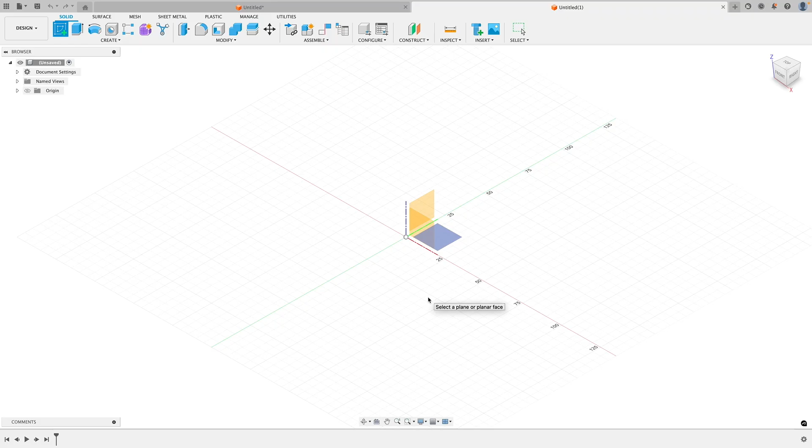So the first thing I'm going to do, we're in Fusion. I'm going to come up here and create a sketch by clicking on the Create Sketch icon. I'm going to choose a plane to sketch on. I'll choose this vertical plane here because I'm going to draw a profile of the wheel looking at the wheel from the edge. Once I'm done with that profile, I'm going to rotate it around this vertical axis. You'll see what I mean by that later on.

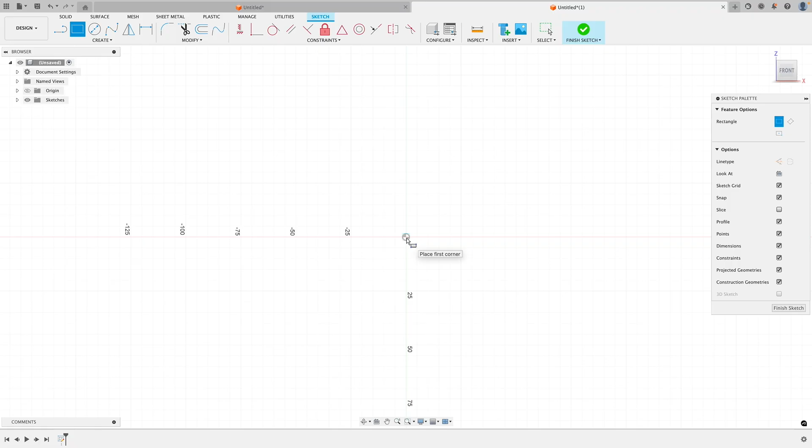So for now, I'm going to select this plane, and I'm going to start by drawing a rectangle here. I'll click on the rectangle, 2-point rectangle icon up here, click on the origin, come out here. Before I dimension this, let me say I use metric dimensions. I find dealing with those much easier than dealing with English measurements. The dimensions I'm going to use here are probably not 100% accurate for drawing this wheel.

Basically, I'm just trying to show you the steps involved. If you were going to do this for real, you'd actually have to figure out what you want your thickness of the wheel to be, and the diameter, and so on.

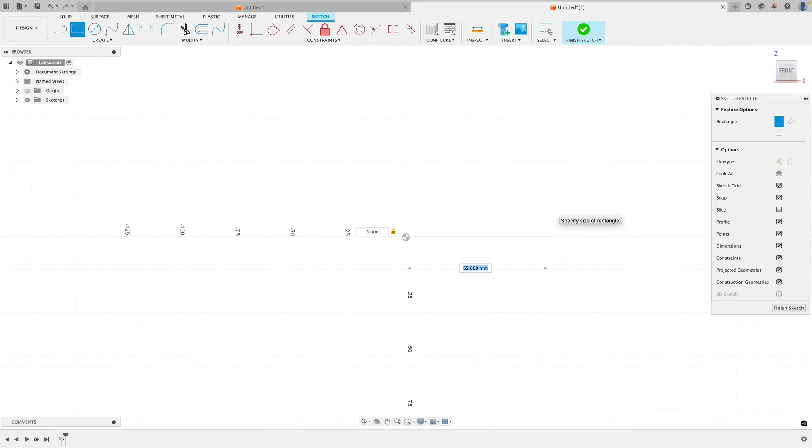Right now, this first measurement I'm going to put in here is going to represent basically half the thickness of the hub of the wheel, the center of the wheel. This will make more sense later on as we progress, but I'm going to say that this is 5 millimeters. Then I hit tab over this, and I'm going to say make this wheel about 3 inches - we're looking at the radius of 1.5 inches in millimeters, which is about 38 millimeters. So I'm going to make this 38 millimeters. Press enter here.

So I guess the next thing worth mentioning is let's take a look at this sketch up here. You can see this is the sketch I'm working on right now, and it has this little lock here. That lock indicates that my sketch at this point is fully constrained. That means everything is locked down, things have dimensions. If I were to try and move this line, I can't. If I hadn't had it locked down, that lock wouldn't be there. And if I didn't have this dimension on here, I'd be able to drag this line up and down.

So what you want to do, as you're sketching anything basically in Fusion 360, is try and keep your sketch fully constrained, because later on we're building a timeline. If we look down here, we're only in the first feature that we started, which is the sketch, but these features are going to continue to build across here as we do more and more things.

And if at some point at the very end, when we finish the wheel, let's say you wanted to change the dimension - maybe you wanted to change the radius or the height or something - you could come back into this sketch, edit that sketch, and change a dimension. But if you didn't fully constrain everything in here, you might not get the results you're looking for. You might distort the sketch really radically, and the bottom line is the finished product won't look anything like what you're hoping it to resemble.

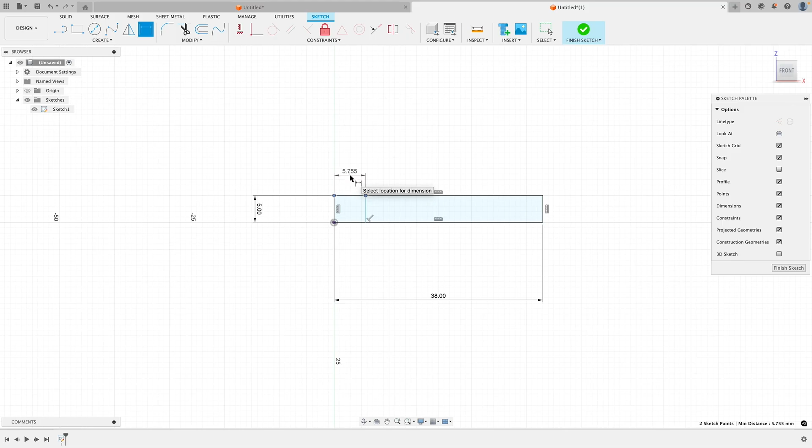So I'm going to hit D on the keyboard for dimension, and then dimension it from this point to this point. This is going to represent the hub section of the wheel, and I'm going to call that 6 millimeters. So let's click on here and say 6 millimeters and enter that. Now you'll see I'm fully constrained again, and I have a line here representing the end of the hub.

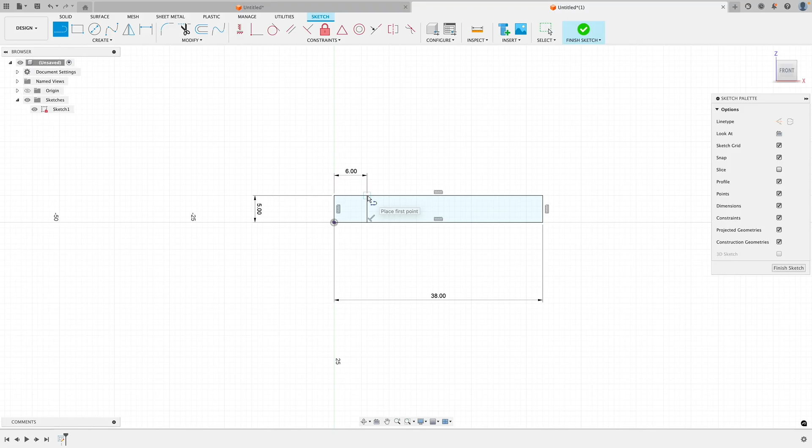So next, I'm going to go up here and grab the line tool again, and draw a line from here over here somewhere - this is basically going to represent the taper on the wheel.

My sketch is no longer constrained, so I'm going to escape from the line tool, hit D for a dimension again, and now I'm going to dimension from this point to this point, and I'm happy with that. I'll call that 2 millimeters. Now we're fully constrained.

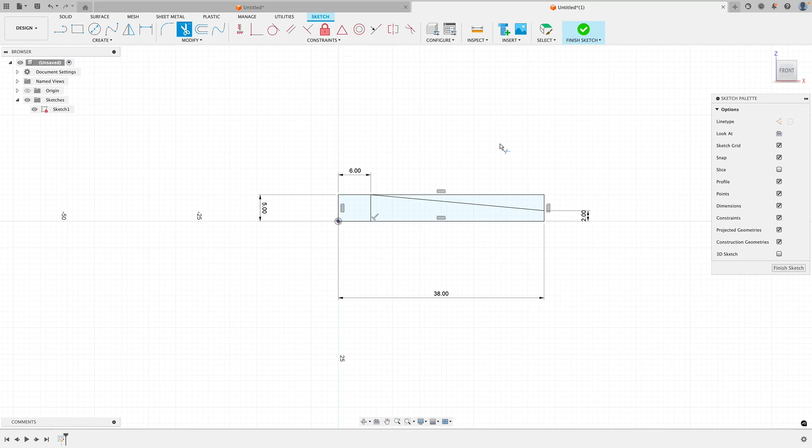At this point, I have things on here I don't really need, so I'm going to trim off. I'm going to go up to this trim icon and trim this line, and trim this line. That's about it. Right now, I have two distinct profiles.

This is a profile, and this is a profile over here. A profile means it's fully enclosed with lines, with no holes in it anywhere, and a profile is something I can deal with later on. So that's what I'm looking for here, although in this case I'd prefer to have one profile when I revolve this.

So what I can do to get to that is take this line. This line is only there for dimensioning - it doesn't really exist in the object I'm making for the wheel. So I'm going to make that line a construction line by going over to line type here and clicking construction. Now you can see it has turned into a dotted line, and if I click in here, I have one profile instead of two.

And I have a fully dimensioned sketch, so I'm ready to move on.

At this point, you probably want to make a decision on how to proceed. Assuming we're going to 3D print this wheel, right now we're looking at just a portion of it - it's eventually going to be rotated over to this side, and you'd see the whole thing. But this is flat, and we don't have a taper coming up on the bottom. If you're going to 3D print this thing, this flat bottom would sit nicely on your printer bed, and you could print this.

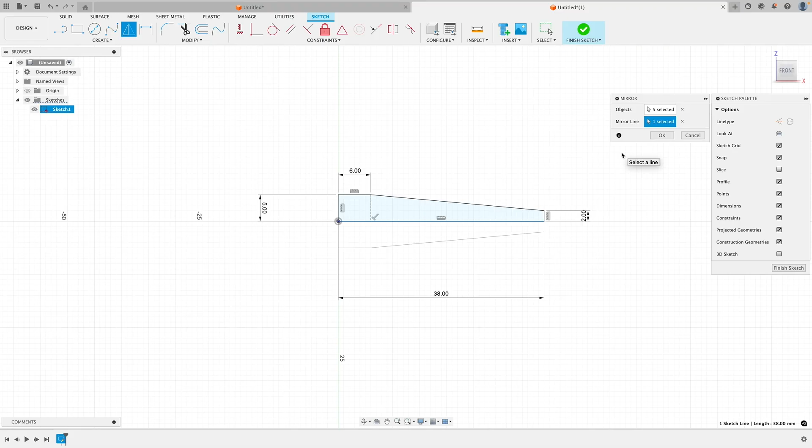And now I have a mirror image. The good part about this is if I change any dimension up here, it'll be mirrored below, so this will always be perfectly symmetrical. Anything I do up here will be replicated down here.

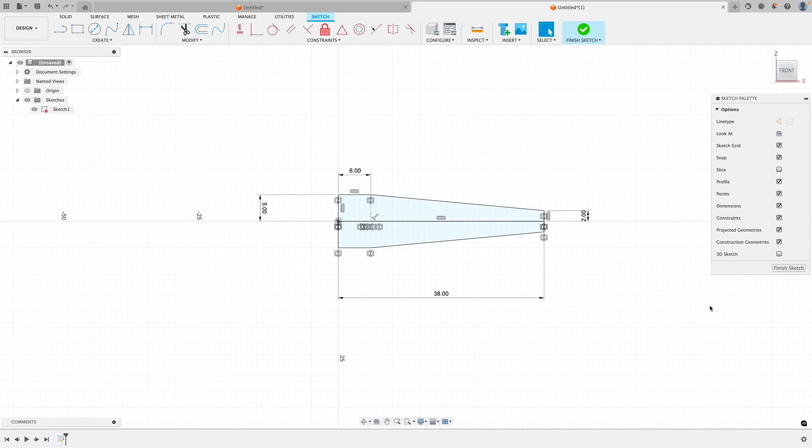Okay, so at this point, I'm pretty much finished with the sketch. I really don't need this line in here - I could make that a construction line, but I'll leave it there for now. And I'm going to go ahead and say Finish Sketch.

All right, so at this point, if we look at this from this point of view, you can see this is what we're looking at.

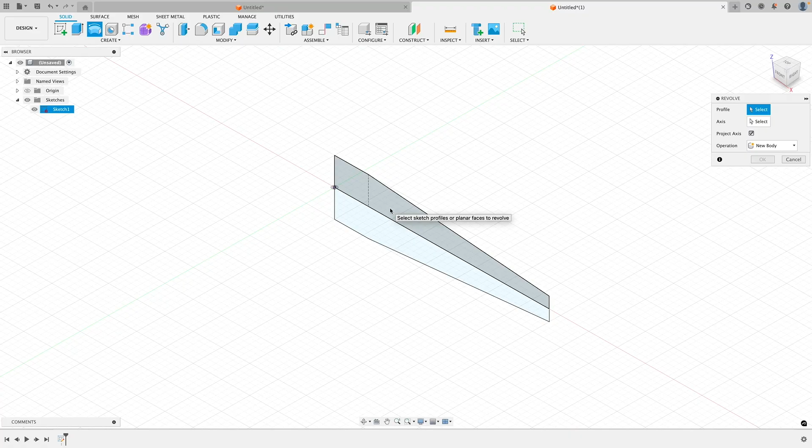Okay, so at this point, I am going to revolve these two profiles about this axis. The first thing I'm going to do is go up here to Create, come down here to Revolve, and now it's asking me to select the profile or profiles I want to revolve. So I'm going to select this one and this one. Then I need to come down here and select the axis that I want to revolve around, and that would be this guy. That's going to show me what it's going to look like.

And I do want it to create a new body. I'm good with all these - I'm rotating at 360, I'm good with all these defaults. So I say OK. At this point, it's looking pretty good.

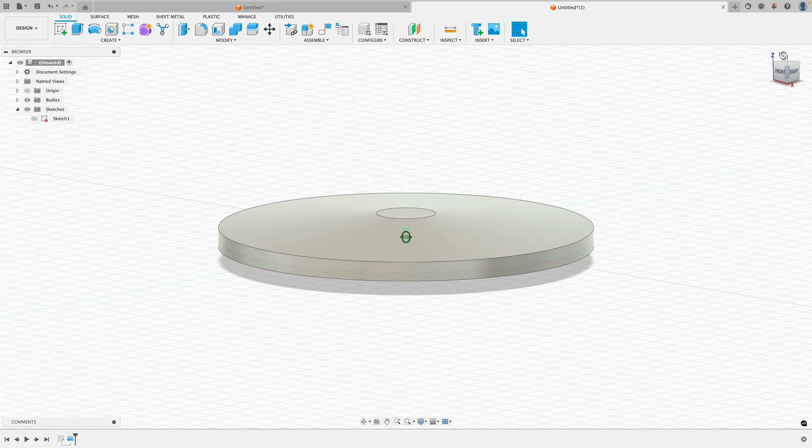Looks like the wheel that we're trying to get. You can see there's a taper top and bottom from the central hub. So we have two things left that we need to do: we're going to want to put a hole through the center for the axle, and probably fillet it around the edges. So let's take care of doing the hole first.

So I'm going to select this here so I'm looking straight on at the top view. And just to note, my origin is turned off here.

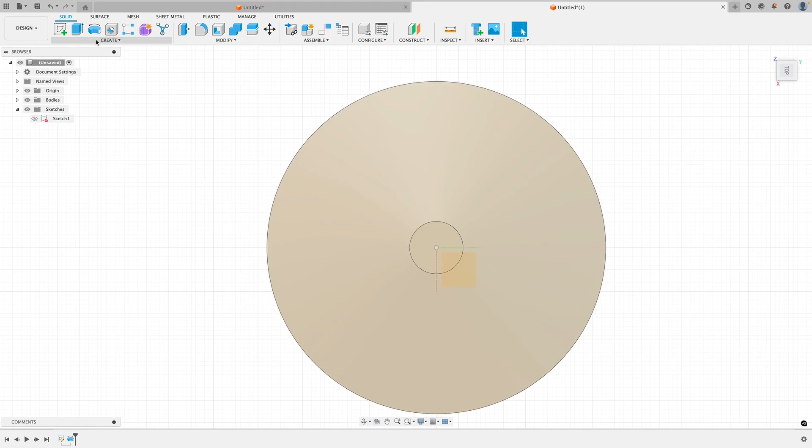I'm going to turn the origin on so I can see right where that center point is. Now I'm going to create a sketch using the create sketch icon, and this time I'll select this plane as the plane I want to draw the sketch on. I'll select a center point circle on that sketch, go down to the origin, and draw a circle out.

Now this dimension is basically where your axle is going to pass through here. I don't know, I think I'll make it 5. But what you'd want to do is determine the size of your axle and maybe make it a little bit bigger, or maybe the exact size and then clean it up with a drill bit afterwards to get the clearance you need. I'll select 5 for demonstration purposes, press enter, and I'm basically finished with this sketch.

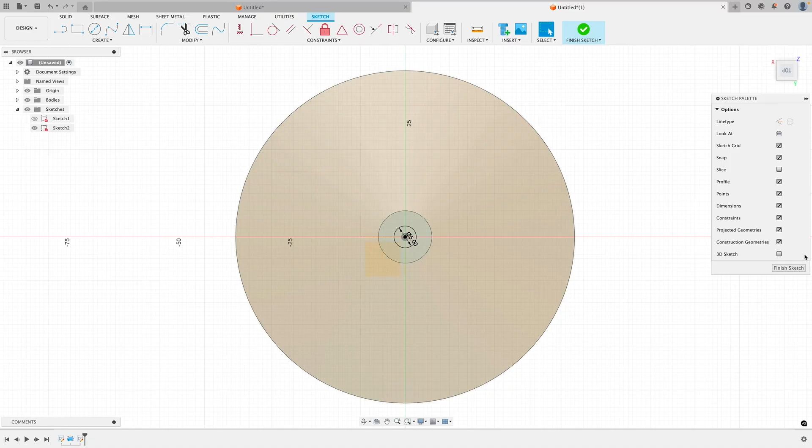So I say finish sketch, and we'll take a look at what we have here now. At this point I'm just going to do an extrude command, and pull this profile down through it with a cut. So I go up to extrude, select the profile I want to extrude, that's this guy, and I am going to pull it down.

Now you'd be tempted to just pull it way down like this, and that would be fine - it's doing a cut operation, and it assumes that since I'm going down through the material, that would probably work. But the preferred method will pretty much guarantee that if you go in and change the dimension of the width on that first sketch, and for some reason you only took this down say this far, exceeding the width of this length here, the cut wouldn't go all the way through.

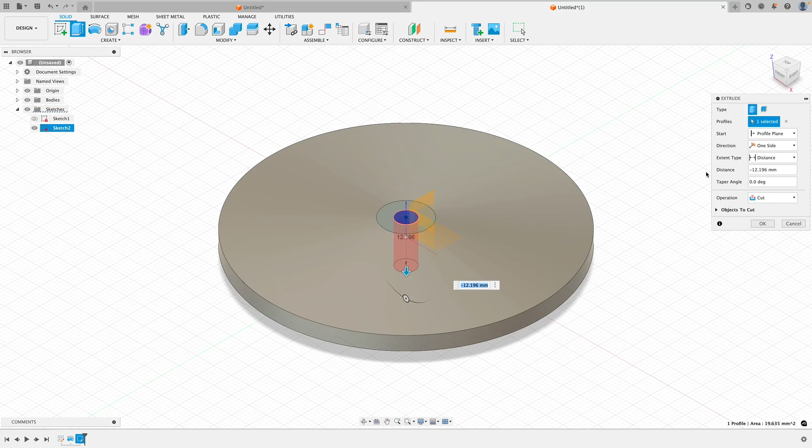So to eliminate that problem, go up to the extent type, change this to an object, then go underneath and say this is the object that I want this to extend to. Now no matter what I make the width of this wheel, this will always extend the cut to that bottom plane of the hub there. I'll say OK to that, and now we got a hole through the wheel.

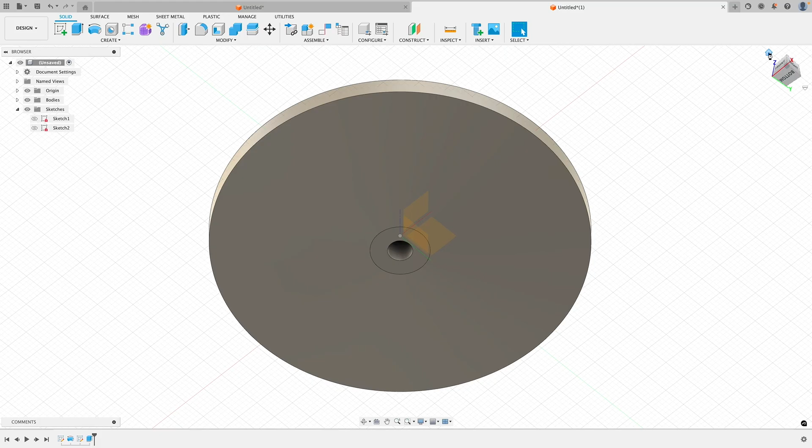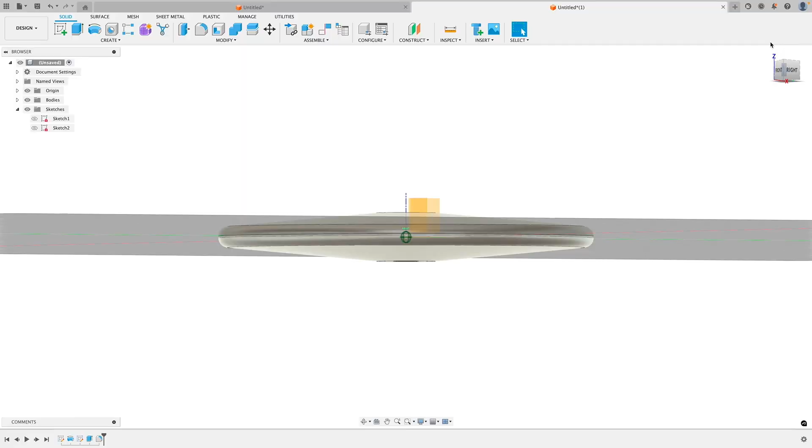So the last thing we really need to do is maybe put some fillets on the edge to make this look a little nicer. Select that one, and that one, and maybe 2 to see if 2 millimeters works. Yeah, that looks pretty good. I'll say OK to that, and now we have our finished wheel - basically it's got the taper we were looking for, it's got the hub, and it's got rounded edges there.

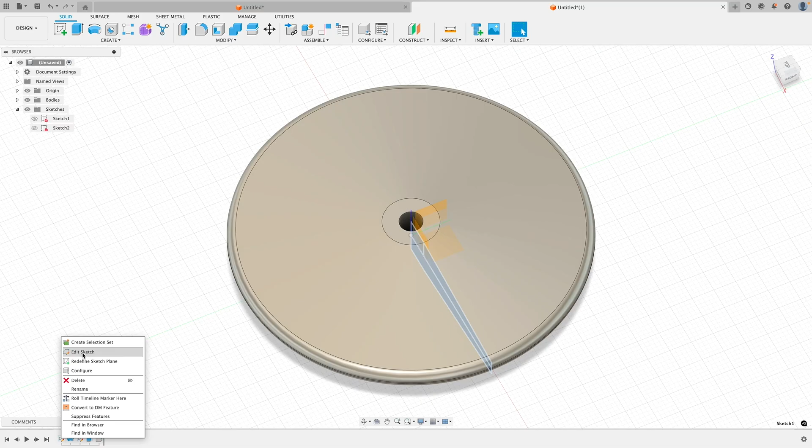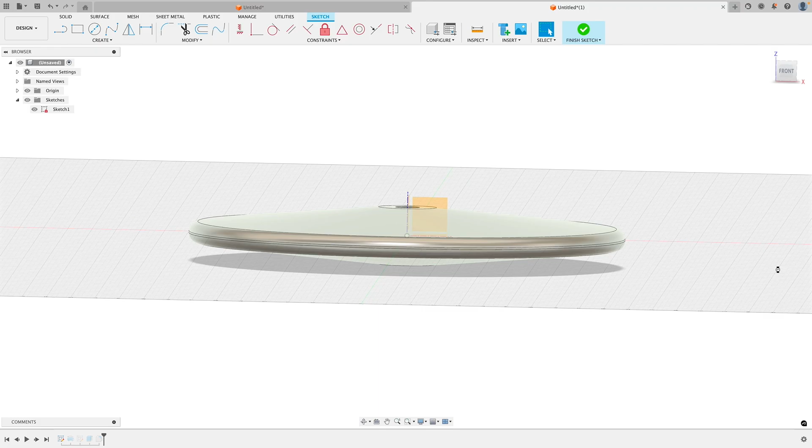So if you save this, and if you ever wanted to go back and change this to a different size wheel, maybe a 2-inch wheel instead of a 3 or a 4-inch wheel, you would edit this very first feature, this sketch here, right click, say edit sketch, and then change any of these dimensions. For example, let's double click on this and make this 6, say enter - that got bigger. Then maybe I want this to go out a little further, I'll make this 45, say enter. Now when I finish the sketch, it's all applied to this, and now this wheel is bigger.

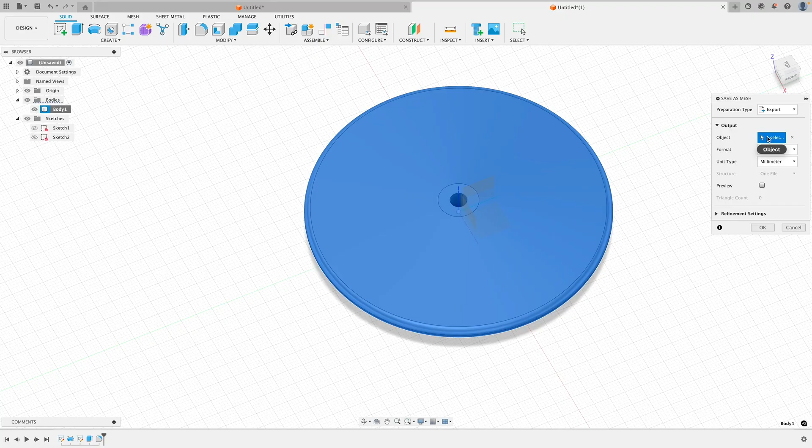So if you fully constrain that sketch we did, you'd be able to do this and we'll work with no problems. If you're going to 3D print this, this is considered a body at this point - if we drop the bodies down, this is the body, that selects the whole thing. You want to create what's called a mesh file or an STL file. So you would right click on body, come down and say save as mesh, and over here you'll see you can accept all these defaults. Just click on OK.

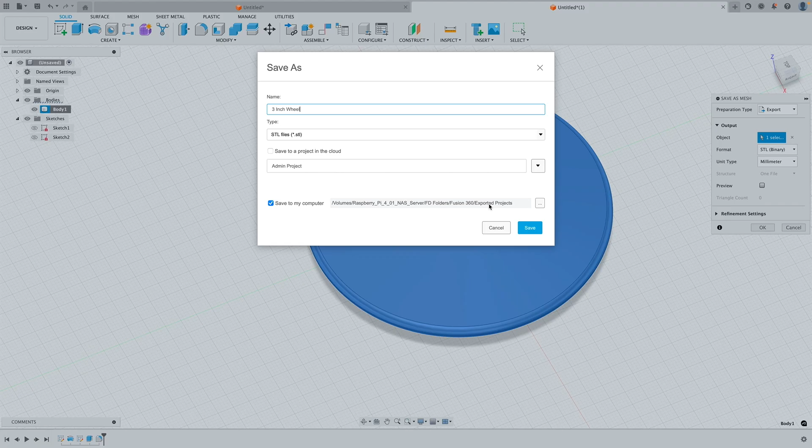At this point we would name this like a 3-inch wheel - maybe I want to spell wheel with an uppercase W. Then it'll save it with an STL extension, which is fine. In my case, I'm going to save it to my computer, and it's going to be placed in this exported projects directory, which is not really where I'd normally put this, but just for this demo I'm going to put it there. I'm going to get this message that it already exists because I ran through this one time and saved one there, so I'll say yes to overwrite that. But at this point I'd have an STL file saved out there in the directory structure where I just placed it.

If I wanted to 3D print this, I would just move that STL file into the slicer that I'm using and go ahead and slice it and 3D print it.